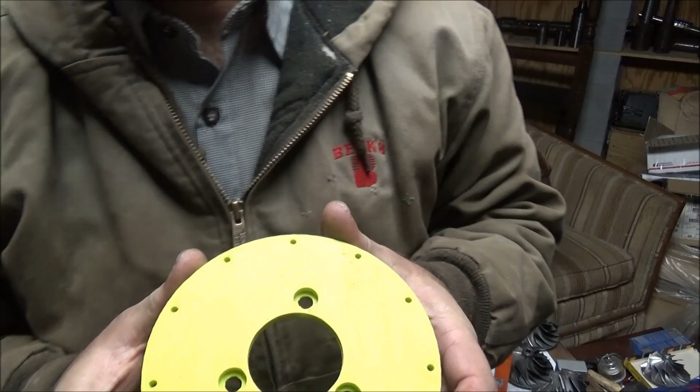So, looking at this dividing head plate, the first things I notice are these holes aren't perfect. Particularly on this, I'm going to say this was the back side, the side that started against the plate. Some more so than others. They're not really round holes, so I can see that maybe being a problem. Same thing on these holes.

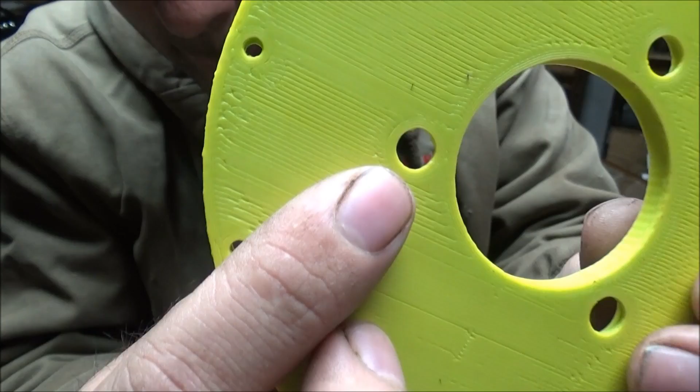But the first thing I'm going to do is we'll throw it in the comparator and take a look at it as is. Then maybe I'll take a drill of the proper size and clean them up and see if the positional accuracy was enough to make it work, even though the holes maybe didn't come out perfect in this. As long as they're in the right place, it would still give you something pretty quick to go by. So let's see what it looks like.

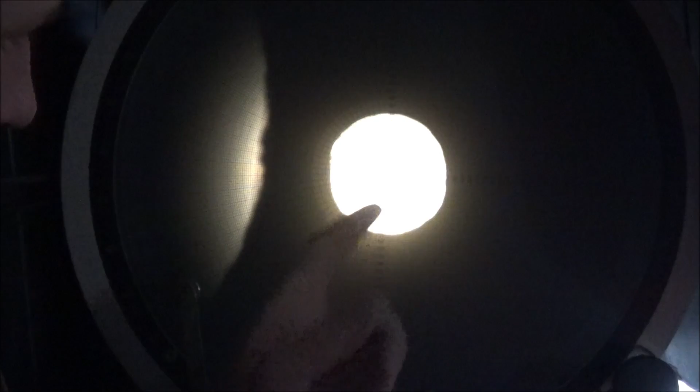I'm sure y'all won't be able to see these numbers on here, but you can see the shape. But anyway, this is one of the main bolt holes, and you can see it goes from about 150 each way this way to like 145 probably that way. It's kind of an ovalish hole. It's close to 300 thousandths, looks like. Let's check out here, see. Yep, 300 and a half. Yeah, 283 the other way.

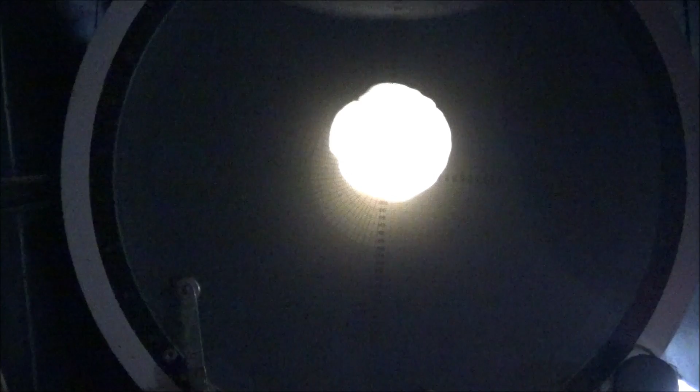There's another hole. If we line up 150, it's probably closer to being on size. It's not oval, but it's got these big hunks sticking in here. This is the third one. About the same. It's close to on size. It's kind of caved in over here on this side. This side's pretty good. Matches the arc. So there's one big chunk in there.

And this plate's really too big for me to go from the center out like what I'd like for this magnification. So I don't know if I can catch two holes. Let's just look at a hole. It's roughly 120 diameter, so I'm assuming that they're supposed to be 1/8 inch holes. Again, the hole's not clean, so that one there's a little better. It's kind of blowed out that side though. It's a pretty good looking hole there. Yeah, that's a pretty nice hole, actually, looks like.

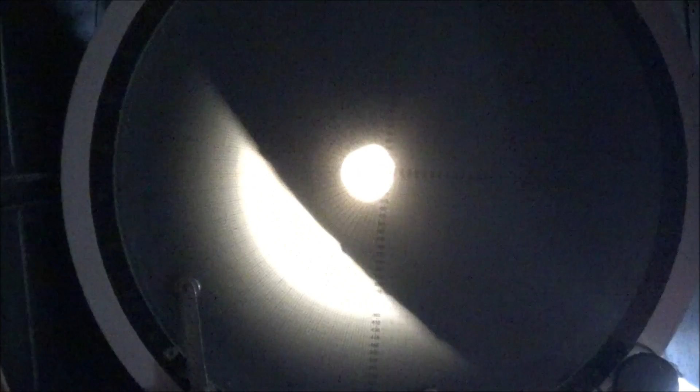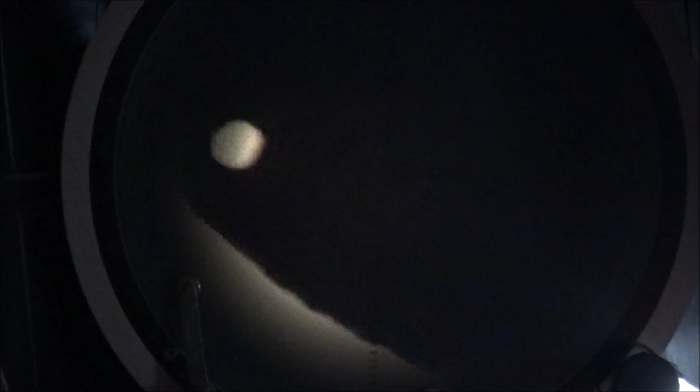And that's not too good. So it looks like there's roughly a 10 thousandths error, at least, associated with these holes. And I can't get them both on the scope at the same time. The max I've got on these micrometers is 1 inch, so I can't screw out far enough to measure the hole position.

The fail there, I guess, is I don't have a low enough magnification on that optical comparator to get out far enough to measure how far apart these holes are. They're more than 1 inch, which is the furthest the scales will move on that, so I couldn't do it that way either. So we're down to the same kind of methods that most people would have in their shop for inspecting this. And what I've got is 2 1/8 inch drill bits.

And what I notice is, going in that hole, it kind of starts in but won't go through. Won't even start in that one. Kind of starts in that one. One. So out of this outer ring of holes, only one of them will the bit fit in as it is.

So let's try and clean that up. Now just a couple twists of the drill. There you go. Let's do this one this way. Not super tight holes, but probably functional that way. See what we get. There's got a little rock, so it'll be tricky to not squeeze it in.

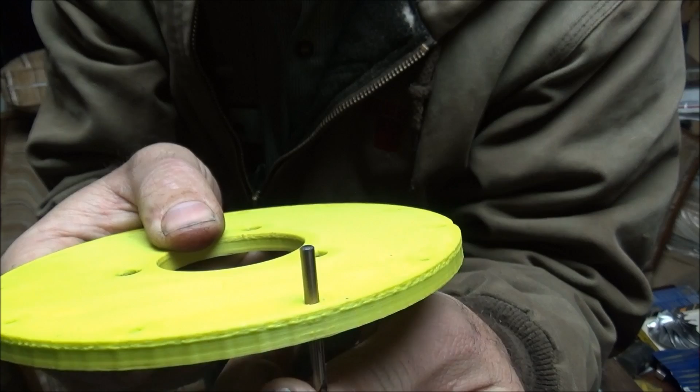Pretty loose. See that? But as far as positionally, if I hold that straight and move it, it's got enough grip that it doesn't really walk around.

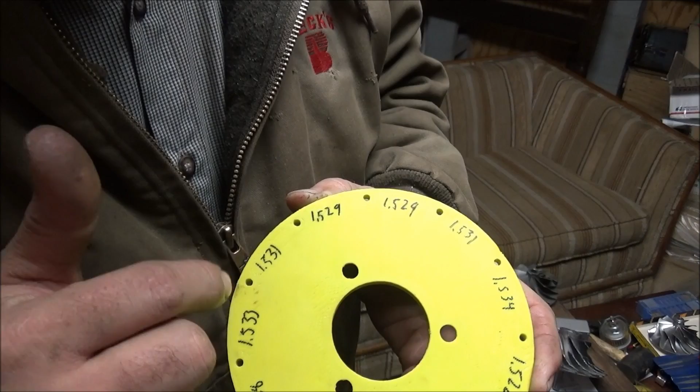Alright, so these are our spacings averaged over the pins to try and make the best guess as to where the hole would be if you actually stuck a pin through it on a dividing head, where this is intended to be used. And you can see we've got anywhere from 1.522 to 1.534. So we've got that 10 thousandths, well actually that would be 12 there, error.

So these numbers are including the drill bit diameter, so that's subtracted out for the actual spacing. But for now, I'm gonna go get a piece of paper and we'll figure out what these numbers should be, and then we'll see what the error is in this part.

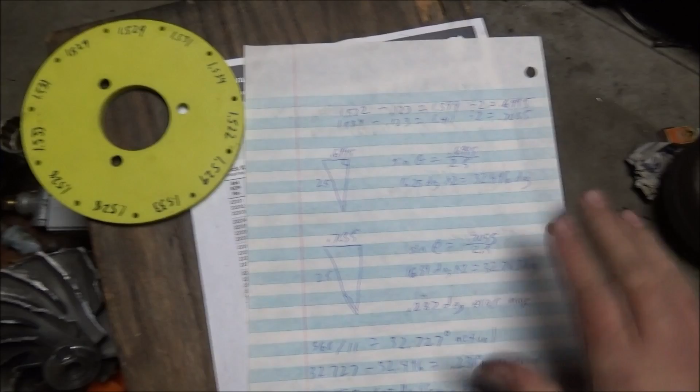Alright, so let's take a look at the math here. I went in there and worked it out in order to find what the angle is here. You've got a triangle right here. So it's a 2.5 inch radius out to the hole. So we've got 2.5, and then the worst hole measured 1.522. Take out the drill bit diameter and it's 1.399 separation.

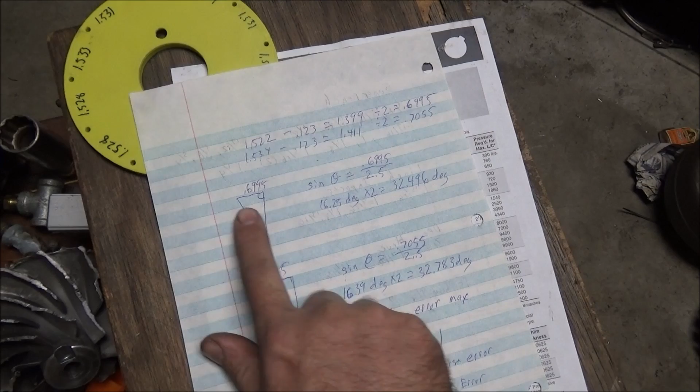Divided by 2 because that's the square, and you've got 0.6995. So sine of the angle is equal to 0.6995 over 2.5, which is 16.25 degrees. But then it's times 2 because we've only done one right triangle, so 32.496 degrees.

And the worst over was 0.7055, which is 32.783 degrees. So 0.287 degrees was the maximum error between the two, but the actual divisions, 360 divided by 11, is 32.727. So the worst error from what is supposed to be correct was 0.231 degrees.

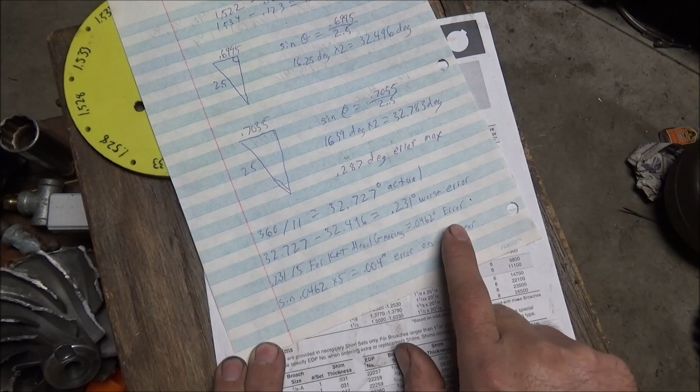Now on the K&T dividing head, I believe it's 5 rotations to 1. So that's going to take that error down to 0.0462 degrees on the actual output side. So take the sine of that times a 5 inch radius for a 10 inch gear, assuming that's what the pacemaker's got, and you've got a 0.004 error on the tooth. That's the worst with this.

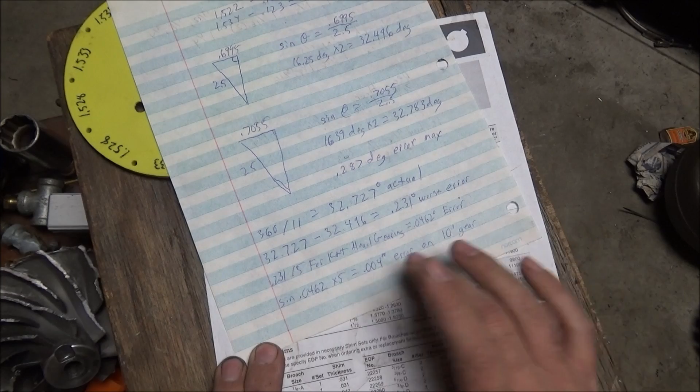So it's probably within an acceptable tolerance for that size gear on that machine. It's not amazing, but it's not bad either. I mean, it's been running with a whole entire tooth missing, so it's a lot better than that anyway. So that's what I found out on this.

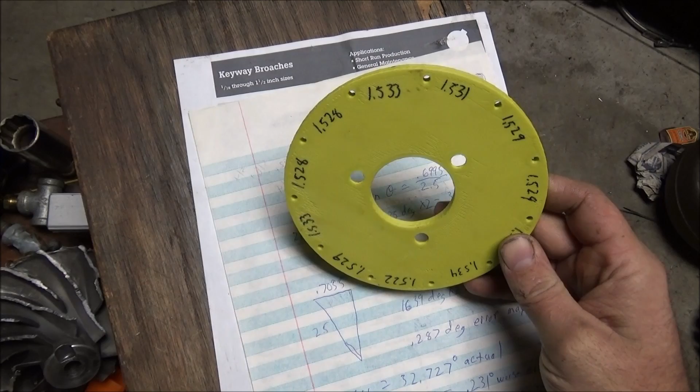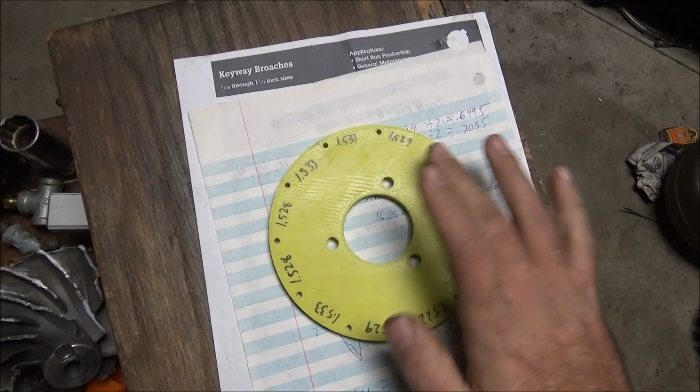I said it's certainly not precision, but it's not bad either, especially not for the time involved. I don't know how long it took to print this, but probably less time than it would take to set it up and drill it all out, even if you did it on a rotary table and drilled them. And even then, with a drill bit, legitimately, if you just drilled these, you're probably going to be 5/1000ths error on the hole.

So you're probably only twice as bad as drilling this plate as far as accuracy wise. So for a quick get-her-done, I think this would be alright. If you want something precision, then you need to either make it, drill it, or if you want to go even higher than that, you're going to have to bore the holes in it.

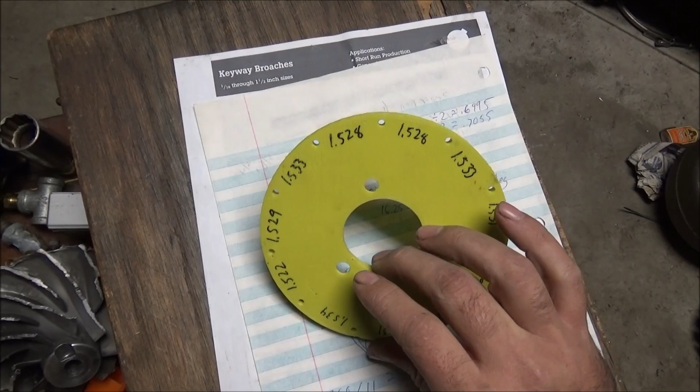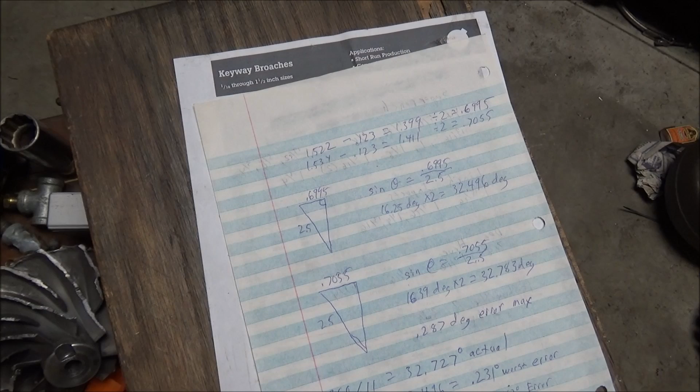So, or use jig guides when you drill it, center drill, spot drill. Lots of things you can do to make your holes better positioned, but not bad. That's your 4/1000ths error on a 10-inch gear. The smaller the gear, the less that error would be, of course. So a 5-inch gear, you'd be off 2/1000ths. But that's what I found out.

Alright, so that's that. The K&T dividing plate has been inspected to the best of my capabilities here. It would have been nice to do this entirely on the optical comparator, but I need to find a lower power lens for it so that I can do bigger components. That's just too big a range. An inch is the most I can cover. When it gets beyond that, it's off the scales and off the chart. I hadn't really realized that until the other day when I was messing with that screw.

But it was interesting to see what the holes look like on there blown out, give you an idea. So that's what we found out. It was probably half as good as drilling this from scratch, accuracy wise, but quite possibly still acceptable. If this was a drilled plate and it was 2/1000ths error, I would say it'd be totally acceptable on a 10-inch gear. 4/1000ths, depending on the class of fit, it may be too much.

But what you could do, since I've marked all these on here, if I send this back to James, I don't know if he wants it back or not, but you could use the ones that are closest to the right hole spacing, because he doesn't have to do every tooth. I think he's only got one or maybe two teeth missing. So you can catch it right here, 1529, 531, 533, and use these three holes to do your three teeth in a line there, and your error would be very insignificant if you use those holes.